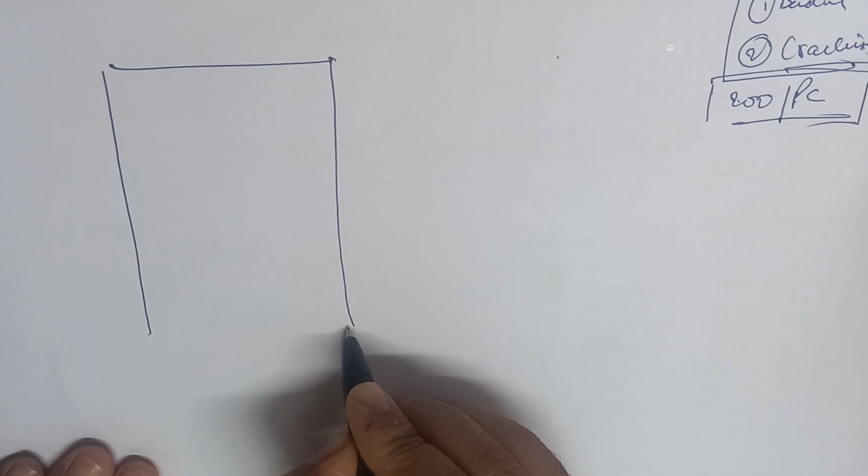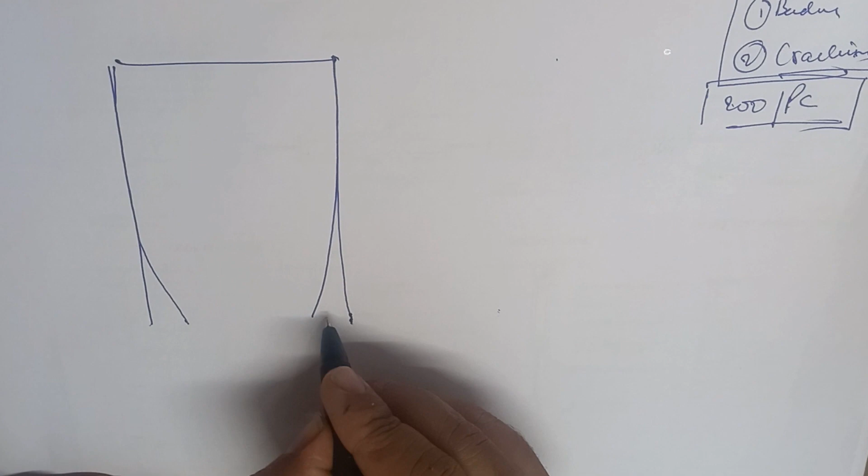So we are making this video to highlight a major problem which comes in many sites as per our experience, where frames are installed and then shutters are installed after some time. So this is a method statement issue where invariably you will see a bending of the frame at the bottom like this. I am exaggerating, and people think that it is a frame wood issue, whereas it is not a wood issue, it is a method statement issue.

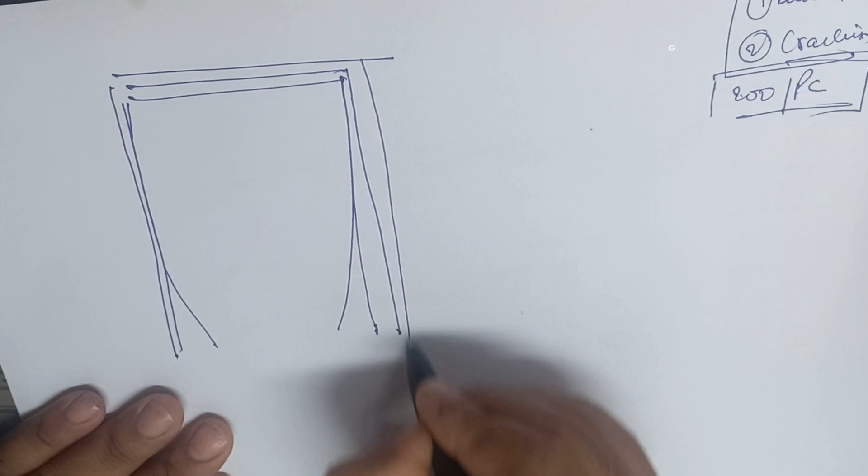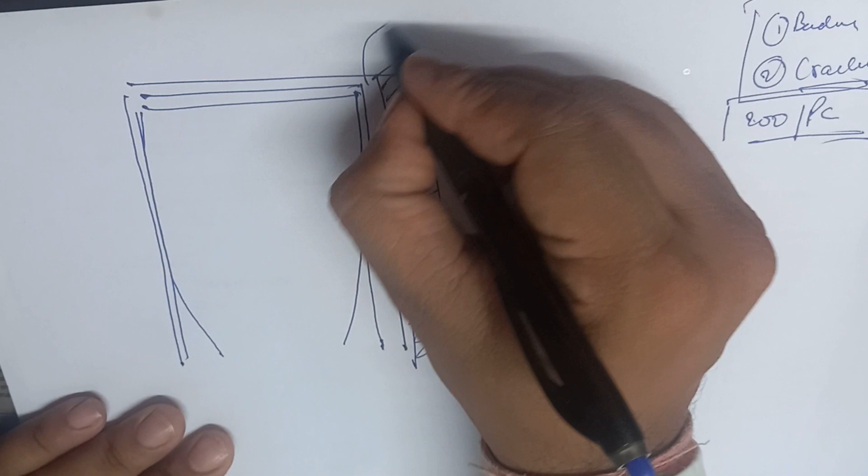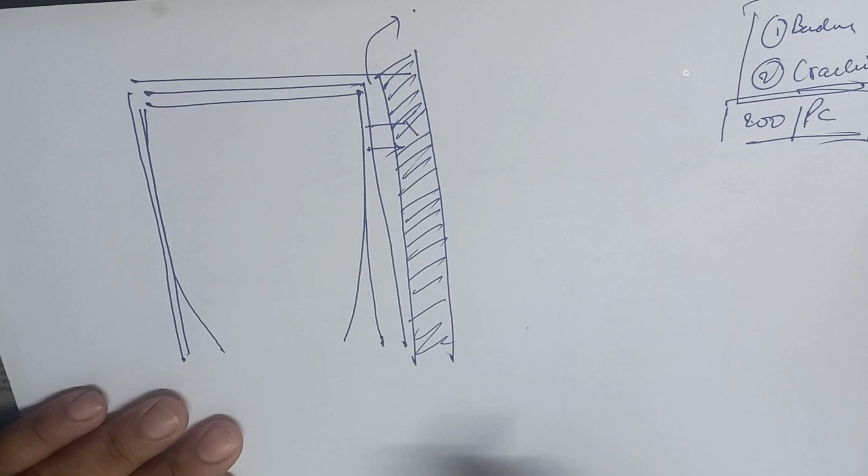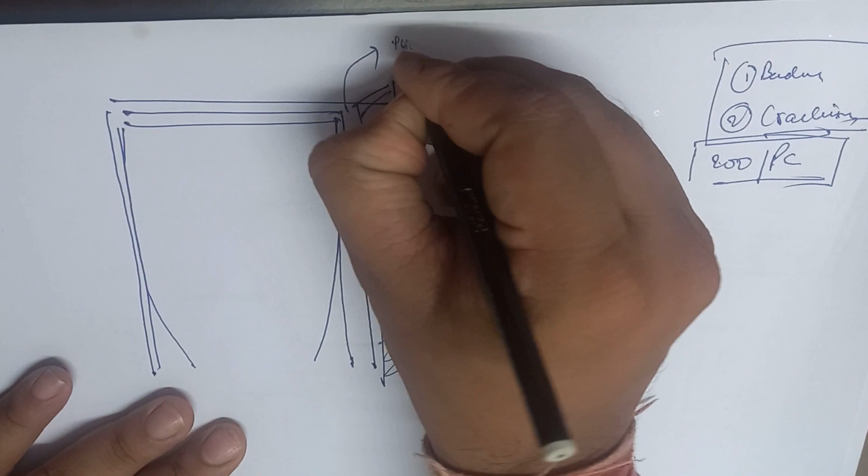I'll tell you how. What happens is, when this is the frame and at the time of installation it is straight, this is the wall jamb, this is a wall jamb. So this happens most often in the case where the space between the frame and the wall jamb, either installed by clamp or even by fastener, is not filled by PU foam but filled by mortar.

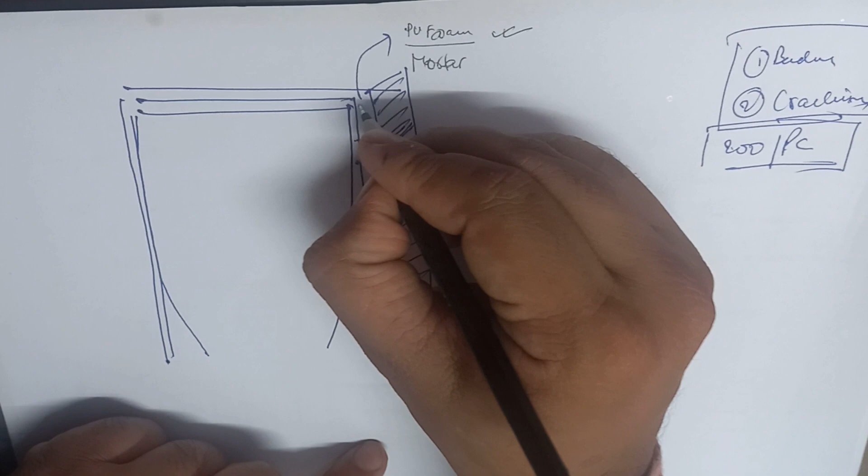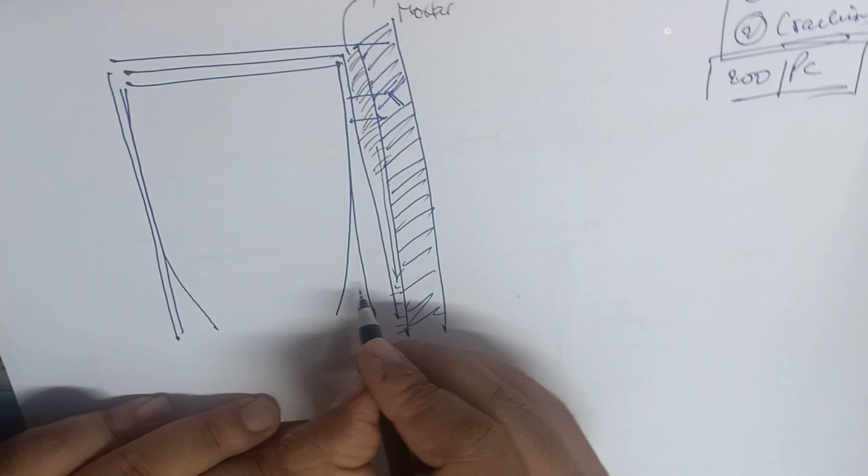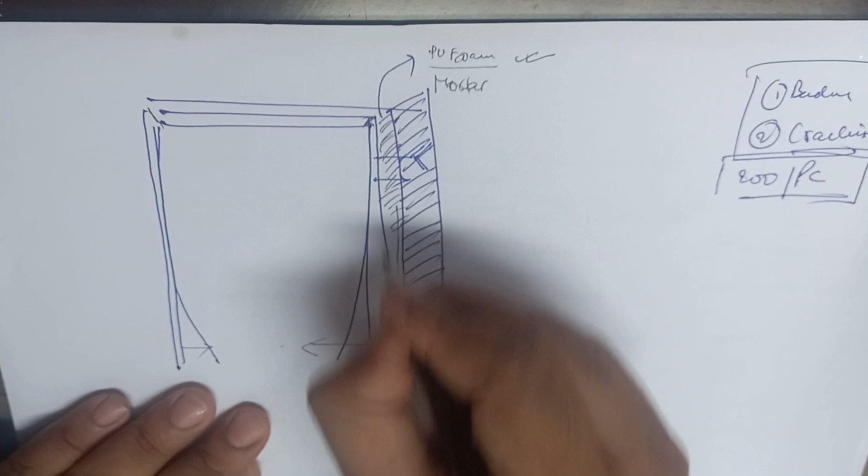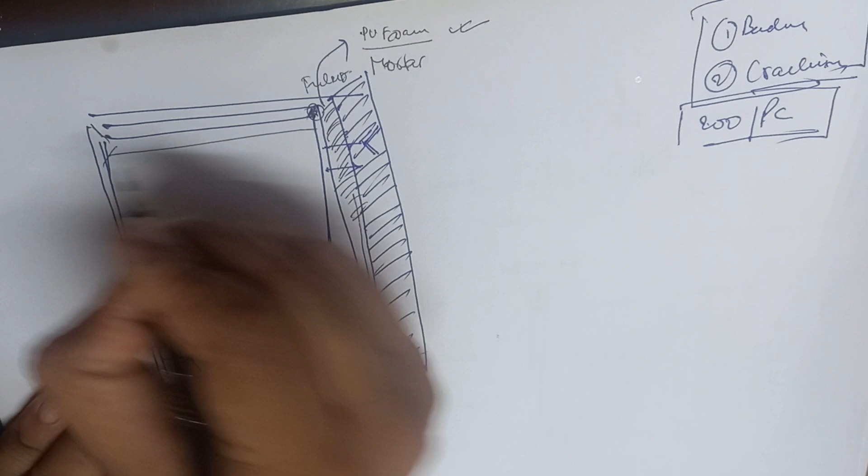So mortar, being a slurrious agent which has water, fills and slopes down. The weight of the mortar happens here. Now this frame is being pushed inwards. Here, this becomes a second class lever where the maximum force is here and here is the fulcrum. So the frame tends to bend inwards. That is why when this is, say, 1000 mm, after some time this becomes 990 mm.

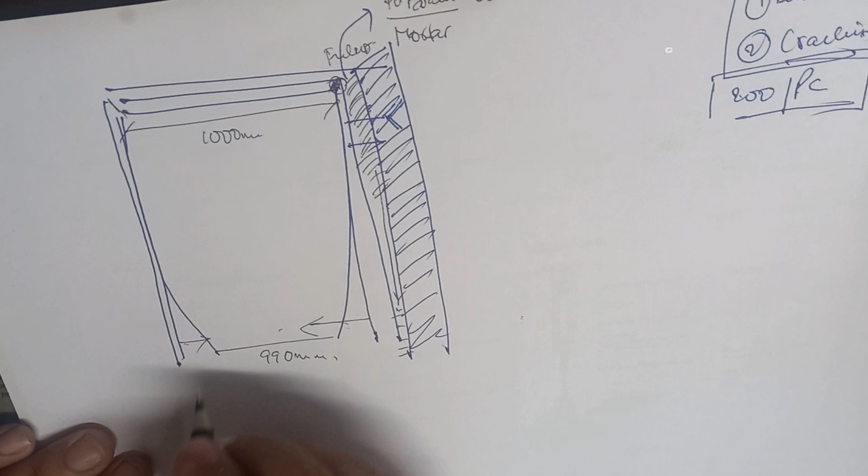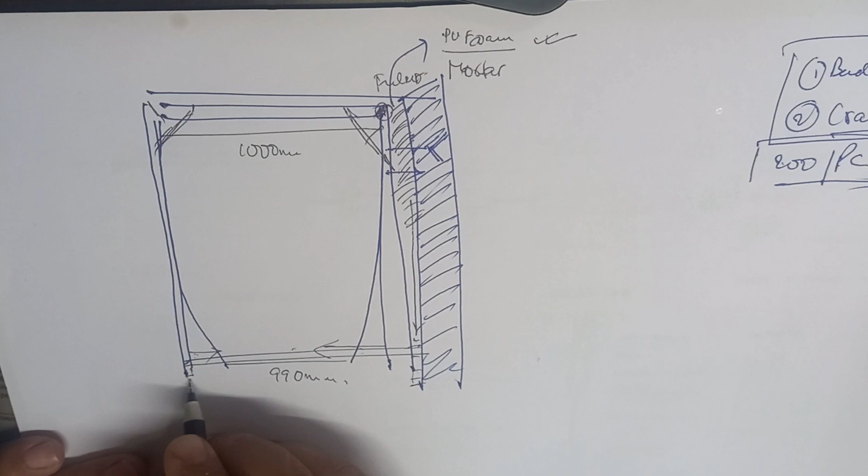The solution to this is simple. During installation, we give a batten that keeps the frame torque and momentum in place. So either keep the batten intact, these battens and the corner battens intact, or alternatively the battens can be given at the bottom of the frame and it can be put inside the flooring.

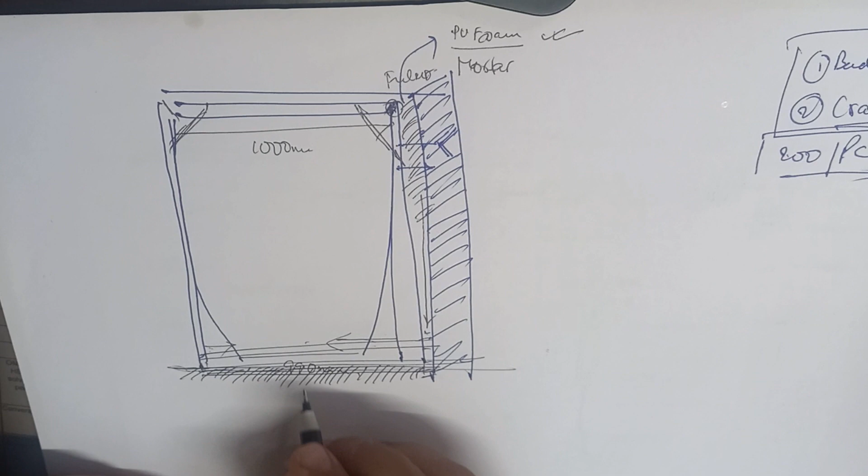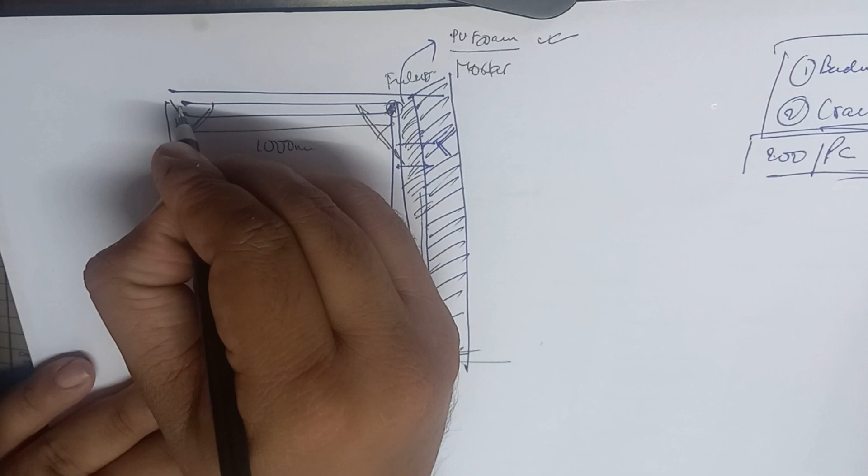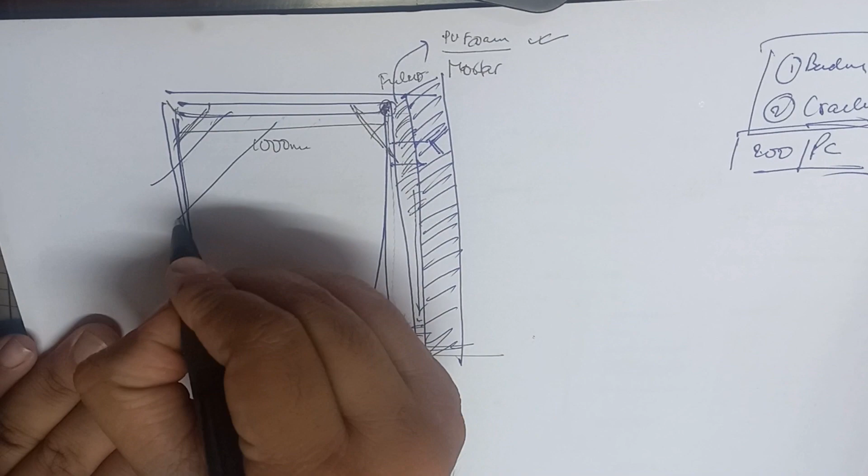You will say that the batten will rot and all that. It does not matter because it is inside the flooring, even if it rots. Firstly, in our case it will not rot because our wood is chemically treated. But even if it rots, it does not matter, because by that time the shutter will be installed and the shutter will transfer the torque from one frame to another and keep the momentum in place.

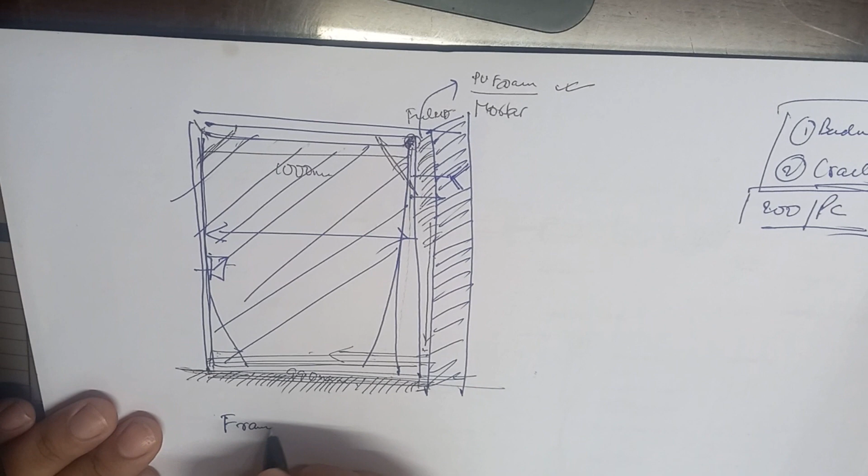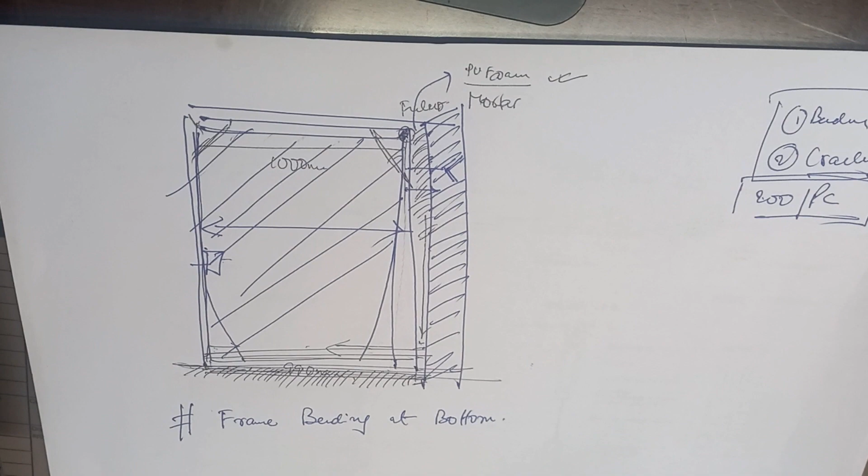So this is chapter 1, where frame bending at bottom is a very common problem, and usually the wood is blamed for this bending. Had it been the wood, it could have been here also, it could have been 990 mm here, but it does not happen that way. And check that in 99% of the cases the bending will be at bottom. Okay, so this is one.

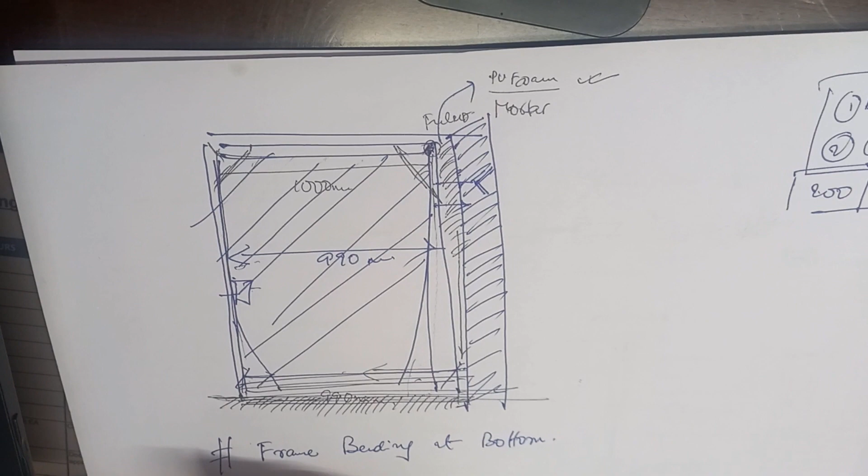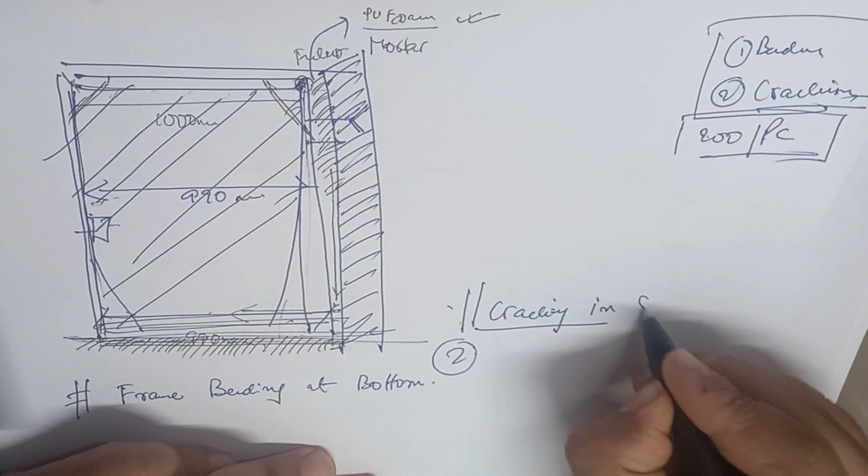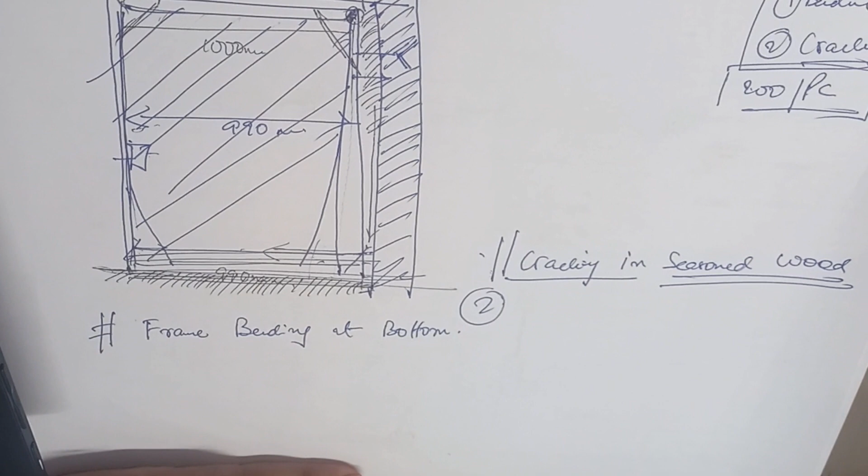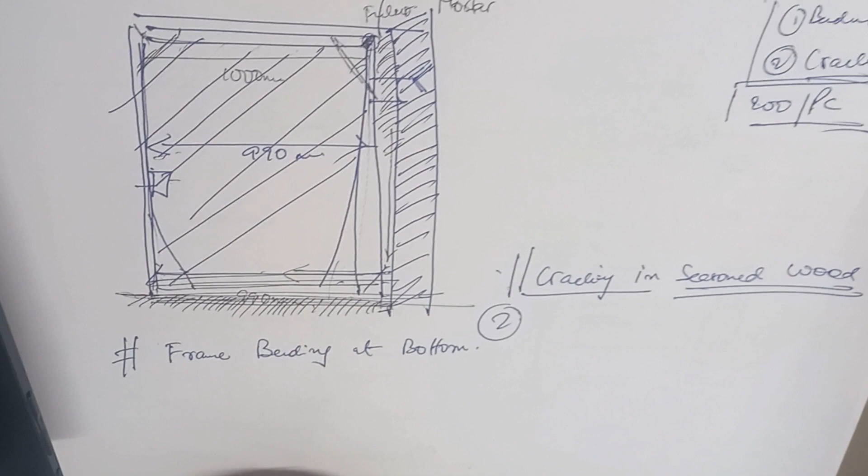Second issue is cracking. What happens is cracking in seasoned wood. Wood is not always available in a constant species. So you take a heavy wood and then you season it and chemically treat it to avoid fungal, borer, bacterial and termite infection, plus bending, warping, shrinking and cracking. Then why does this seasoned wood, which you have measured at a moisture content of 10 to 15%, crack? It cracks because wood is a hygroscopic material.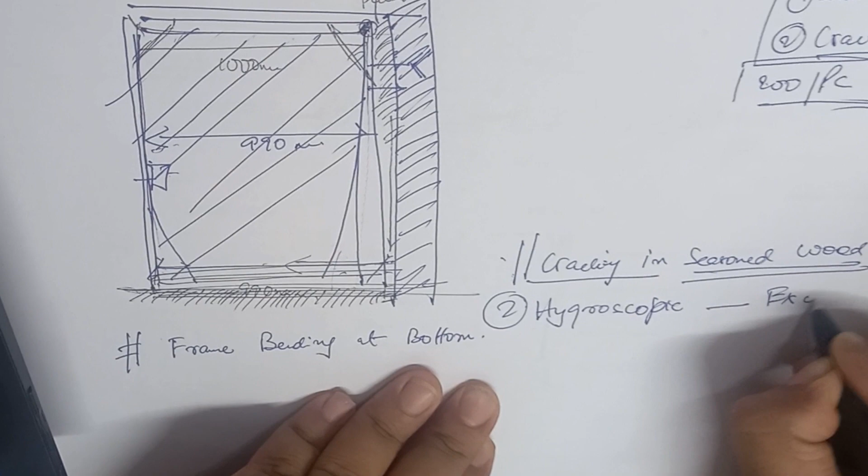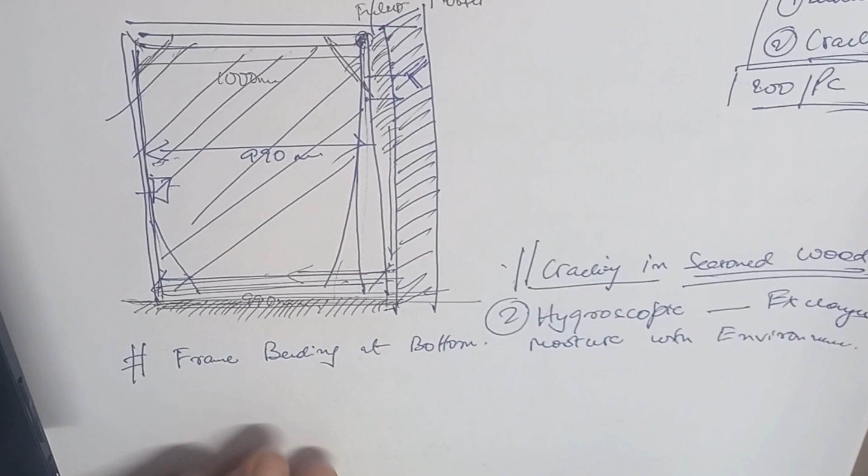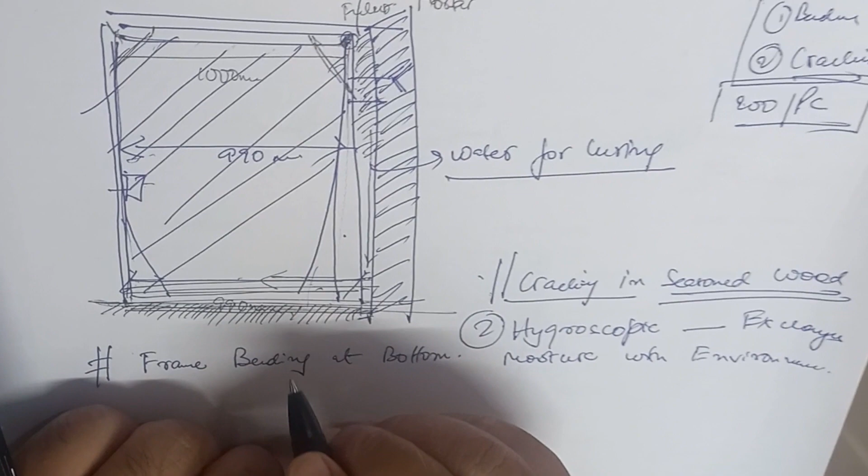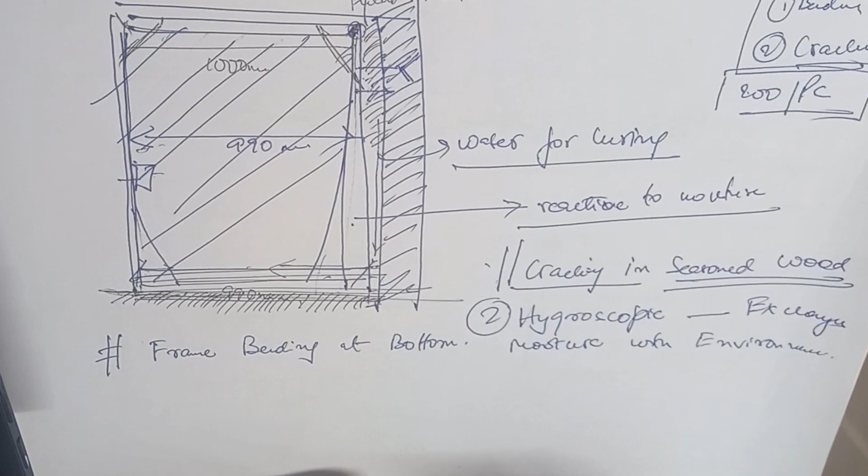It exchanges moisture with the environment. So what happens is, especially in the mortar case, when you throw water for curing, seasoned wood at 10 to 15% moisture is more responsive, reactive to moisture. It absorbs moisture easily, and then again it releases moisture, causing cracks.

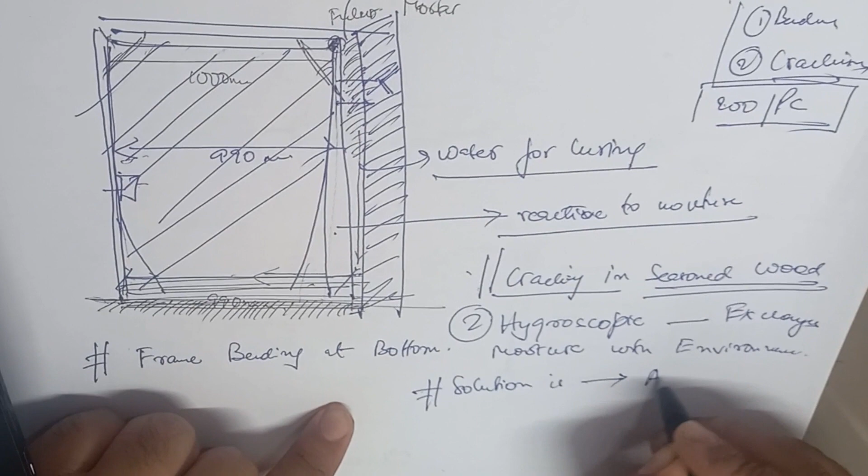What is the solution? Solution is apply primer. Apply wood primer so that the seal is closed and there is no hygroscopic exchange. So I suggest, instead of installing raw frames, you apply putty first, and after putty apply primer, wood based primer.